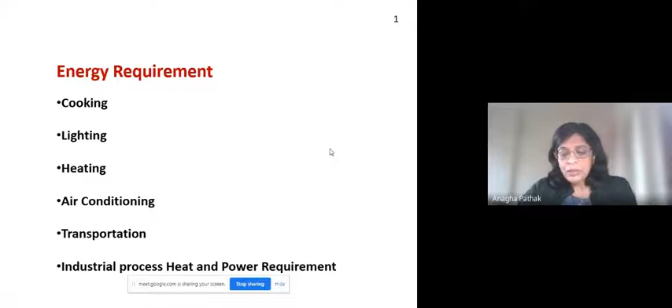So we need energy in our day-to-day life for various activities. Right from when we get up in the morning, we start our energy usage for various purposes. For cooking, lighting, heating applications, air conditioning, transportation, and for industrial process heat and power requirements, we need energy. So basically, we need energy mostly in the form of heating and electricity. The use of energy has become an integral part of our lives, so its supply should be secure and sustainable.

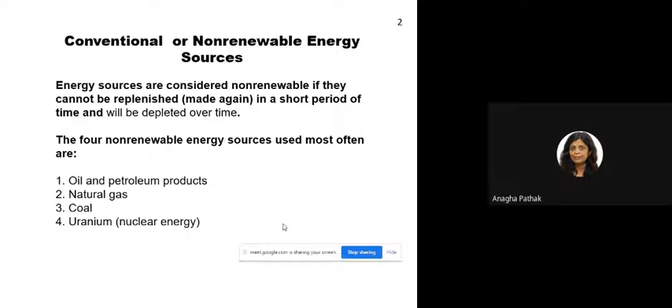So excessive dependence on oil imports, unstable energy prices, poor air quality, high levels of financial risk and uncertainty are other factors deterring the use of conventional energy sources. So now the time has come, and already the government's focus is on new and renewable energy sources. So what are renewable energy sources? It is a natural source of energy which has unlimited supply and can be replenished naturally. Renewable energy can be used again and again, and it never runs out, unlike non-renewable energy sources.

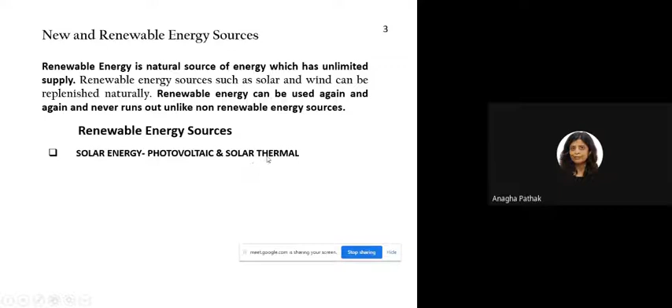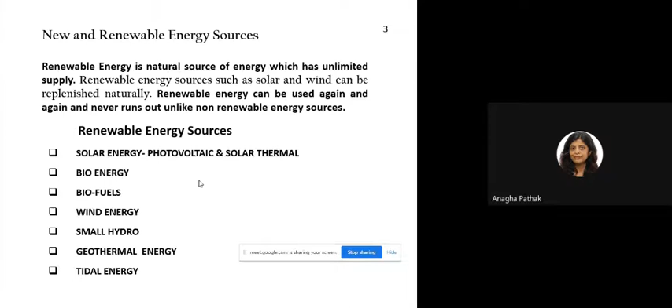So what are the various renewable energy sources? Most of us know solar and wind energy. Solar energy is in two forms: photovoltaic and solar thermal. Then bioenergy, biofuels, wind energy, hydro energy, geothermal energy, and also tidal energy. These are the various renewable energy sources. We are observing nowadays that the usage of renewable energy has increased. So what are the reasons for this?

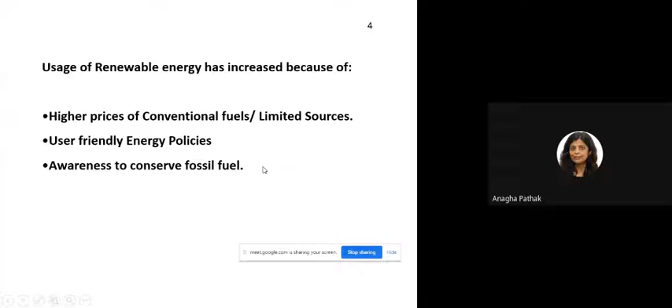The higher prices of conventional fuels and the limited sources of conventional fuels have led to the usage of renewable energy. Then there are user-friendly energy policies from our government. The government is promoting the usage of renewable energy, and user-friendly policies have been created by the government. The awareness to conserve fossil fuels has increased among people, and it also reduces the emission of greenhouse gases and helps to control global warming.

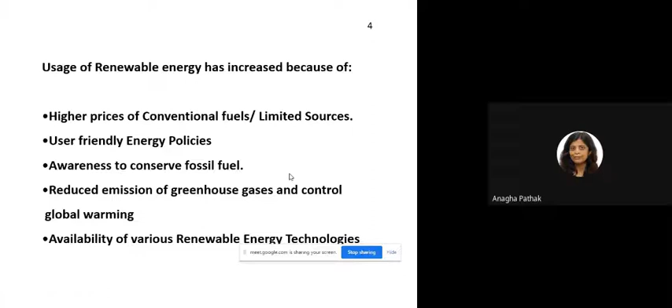Also, the availability of various renewable energy technologies. Nowadays, we have various renewable energy technologies available to us, be it solar energy or wind energy or any other form of renewable energy. Earlier, that was not the case. Very limited technologies were available. So today we will discuss the solar energy technologies available to us.

First of all, the topics of today's presentation will cover solar radiation, which is the important input for the usage of any solar thermal device or solar PV device. Then the various solar thermal technologies: low temperature solar applications, medium temperature solar applications, high temperature solar applications, and their integration. That is the most important thing, to use solar technologies in an efficient way.

So we all know that the sun is producing energy for billions of years, and solar energy is the solar radiation that reaches the earth. This energy can be converted into other forms of energy such as heat and electricity. The solar energy or the sunlight, you can say, is a very dilute source of energy, so it needs conversion in the usable form. So what are the various advantages of solar energy?

It has abundant reserve, practically unlimited, available everywhere. Then it is a high quality energy, non-polluting, and it's a natural source, and energy security is also a factor. So we can see that it is the everlasting renewable source of energy, and being the clean energy source, no potential damage to the environment. Also, it is a very large source of energy, available unlimited. Then it is free, available to all, unlike fossil fuel sources, which are concentrated at some location only. And this equitable availability plays a very important role in social development, especially in a developing country like India.

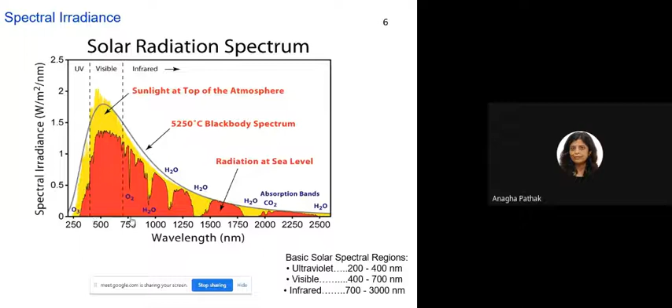So various wavelength ranges, basic solar spectral regions are, here you can see ultraviolet 200 to 400 nanometers, visible 400 to 700 nanometers, and infrared 700 to 3000 nanometers. The solar constant is measured at the surface perpendicular to the sun rays, and it is taken as the average of measurements throughout the year. So due to the variation in Earth's distance, the amount of solar radiation that is received at the Earth's surface varies, that we have seen. Then the solar constant is the average value of the extraterrestrial solar radiation over a year.

The Earth continuously receives 174 into 10 raised to power 15 watts of incoming solar radiation at the upper atmosphere. When it meets the atmosphere, it reflects back 6% of the irradiance, and 16% of the radiation is absorbed. The sun rays outside the Earth's surface travel parallel to each other. Okay, and when the solar radiation passes through the Earth's atmosphere, it undergoes several interactions like absorption or scattering interactions. And these interactions are with the gaseous molecules present in the atmosphere like carbon dioxide, ozone, or water vapors.

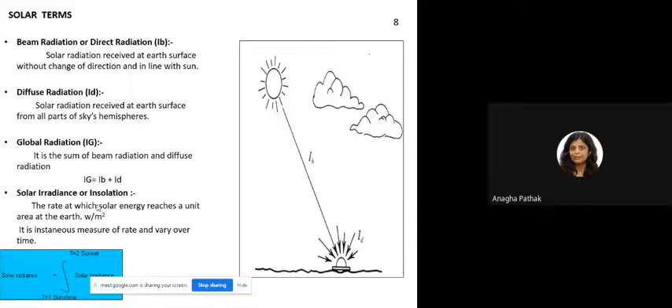So thus the total radiation reaching a given point on Earth's surface is the sum of direct radiation, diffuse radiation, and albedo radiation. The percentage of albedo radiation is very low. That's why many times we ignore it. These terms are very important. Like I explained earlier, beam radiation or direct radiation is the solar radiation received at Earth's surface without change of direction and in line with the sun. Diffuse radiation is the solar radiation received at Earth's surface from all parts of the sky's hemisphere, and global radiation is the sum of beam radiation and diffuse radiation. So for you to understand this much is enough. There are certain other terms also, so we will not go in details.

Then there are various solar radiation measuring instruments. In order to measure the global and diffuse radiation, an instrument called a pyranometer is used. Here it is shown in this figure, pyranometer. The direct solar radiation is measured with the help of a pyrheliometer, and the global solar radiation is measured with the help of a pyranometer. Normally, temperature sensors are used in these instruments. The response of the temperature sensor is proportional to the light intensity falling on the sensor, and the signals from the sensors are then converted into solar radiation intensity equivalent readings, that is millivolt.

And then a thermopile is used as a light sensor. Here there is a black plate, black absorber plate. One end of the thermopile is attached beneath this black plate, which gets heated when light falls on it, and the other end of the thermopile is kept in such a way that it does not receive any solar radiation.

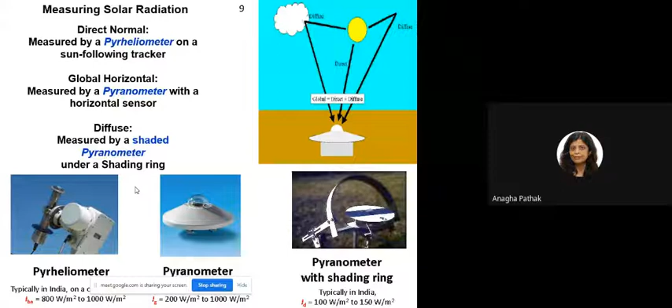So due to this, the tube should be accurately directed towards the sun. For this purpose, the tube is mounted on a 2-axis tracking device, so that at all times it should receive the direct solar radiation. So these are the solar radiation measuring devices.

Here, just a minute.

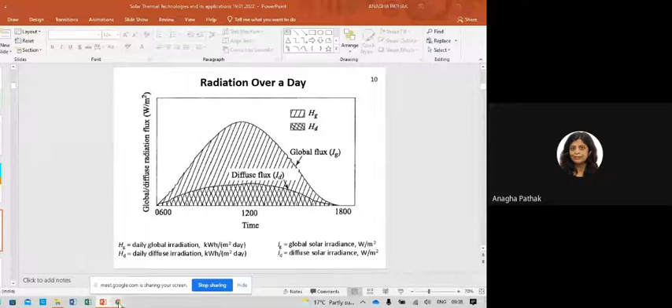Okay, so here in this figure, you can see the intensity of solar radiation is low. We can feel it and observe it also, that during the morning hours, the intensity of solar radiation is less. As the day goes on, the solar radiation goes on increasing with time. It reaches its peak at noon, and then again it starts decreasing, and at the end of the day, again the intensity is very low, and during night hours there is no solar radiation. So this is a typical curve of solar radiation over a day.

So now let us talk about the solar energy. It is available to us in two forms. The one form is solar thermal energy. When it is converted to thermal or heat energy, solar energy can be used to heat water, for use in homes or buildings or swimming pools. Also, it can be used for heating spaces like inside homes, greenhouses, other buildings.

It is used for heating fluids for various industrial process heat applications. In our industries, most of the process heat requirement is in the range of 250 degrees centigrade, which can be easily fulfilled by using this solar thermal energy. And other applications can be cooling and cooking applications.

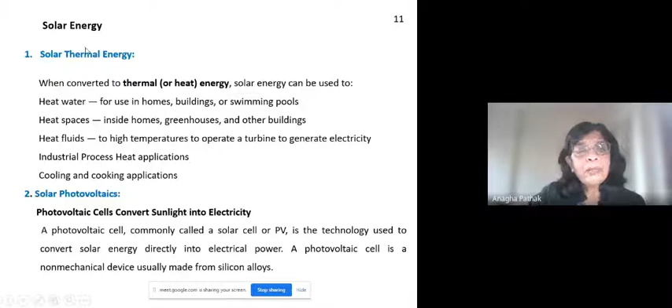So we will be talking about this solar thermal energy part mostly today. So let us see how to use this solar thermal energy. Now you understand what this solar radiation is. It is measured in watts per meter square. When this solar radiation falls on the solar collector, there is a working fluid flowing through it. It gets heated because of this solar radiation and it is converted into solar thermal energy, which we can use for various applications.

So this figure will make it more clear. This is the sun. The solar radiation coming from the sun falls on this solar collector. The solar collector is mostly painted in black color. As we all know, black color absorbs more heat. So once the solar radiation falls, because of this black color and the absorber plate, the collector gets heated, and the water or the working fluid which is flowing through this collector also gets heated.

And when the water gets heated, its density becomes less and it goes upward. This heated water always goes upwards, and then we can take it out and use it in the form of thermal energy. So this concept is common for all the solar thermal energy devices. This is the working principle of any solar thermal device, you can say.

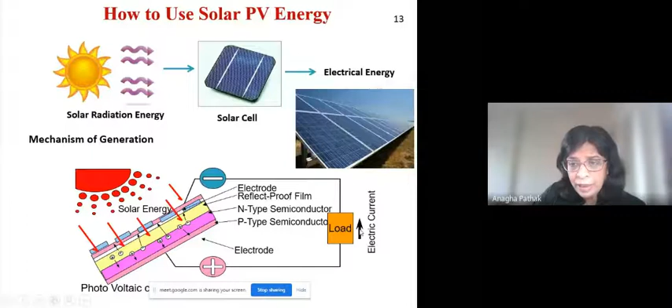But when the solar radiation is incident on these solar cells, the positive holes are collected near this p-type semiconductor and negative electrons are collected near the n-type semiconductors. When the load is connected to it, the electric current flows through it.

Under these stationary collectors, there are flat plate collectors or evacuated tube collector systems. These are basically low temperature range because no concentration is done there. Under evacuated tube collector systems, there are again various subcategories depending on the type of glass or the arrangement used, that I will explain in details in the upcoming slides.

Another category is concentrating collectors. In our childhood, all of you must have used a lens to burn a piece of paper. There we concentrate the sun's energy on a single point and increase the intensity of solar radiation, by concentrating the solar radiation on a smaller area, which can burn the piece of paper, as almost we have tried in our childhood days.

The same concept is used in solar concentrators. Solar concentrators are tracked as per the movement of the sun. The tracking can be in the east-west direction or in the north-south direction also. Depending on the tracking mechanism, if it is tracked only in the east-west direction as per the sun's movement in a day, it is called single axis tracking. And if it is tracked depending on the position of the sun in the sky, in the north-south direction also, then it is called a dual axis tracking system.

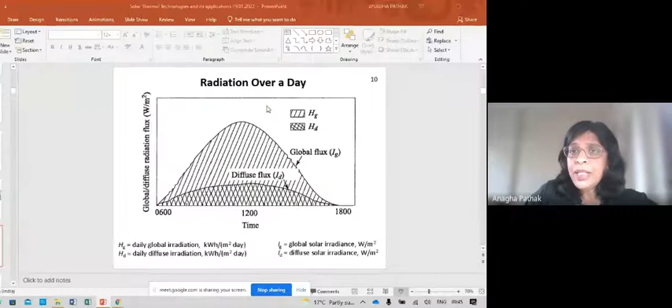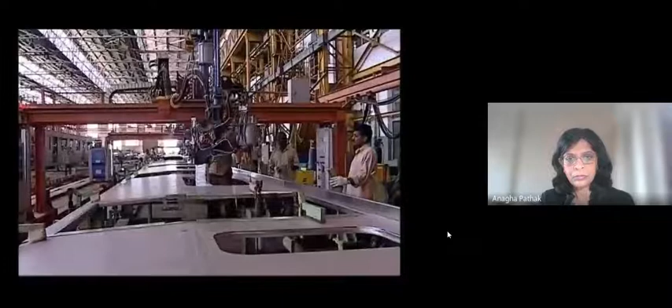Availability of energy sources is the cornerstone of development for any country. In India, the ever-increasing demands exerted by the multiplying population, rapid urbanization, and progressing economy has led to serious shortages of energy. Dependency on fossil fuels is not only adding to harmful greenhouse emissions in the environment, but their continuous depletion has led to a consistent rise in fuel prices. Currently, industries in India are relying too much on conventional sources of energy, which is proving detrimental both for the economy and the environment. We are on the verge of a serious energy crisis. But the answer to this energy crisis lies with the environment itself.

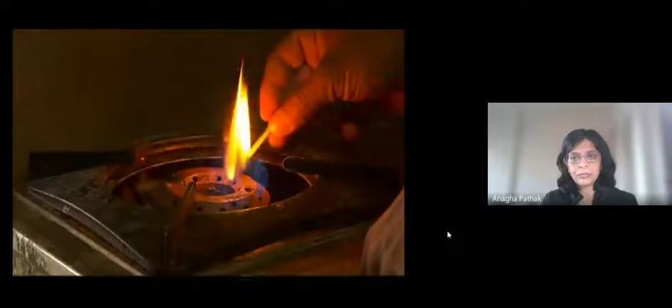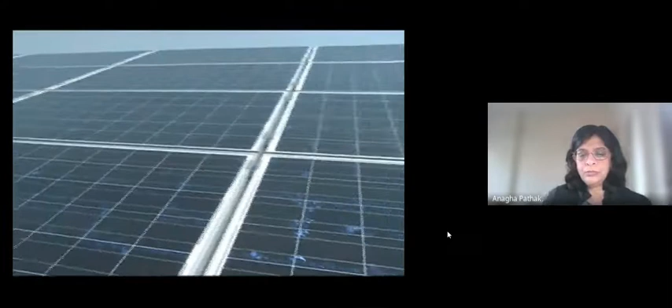Renewable energy has proved its viability amidst the energy impasse. Renewable energy sources like wind, tidal, biomass, and solar are easily available, and technologies have been developed and proven to harness energy from these naturally occurring sources for various uses. Sun is the primary source of all forms of energy on Earth, and today, with the development of different technologies, it is possible to harness energy from sun. The solar photovoltaic technology, which converts energy from sunlight into electricity, is quite a popular technology to harness sun's light energy.

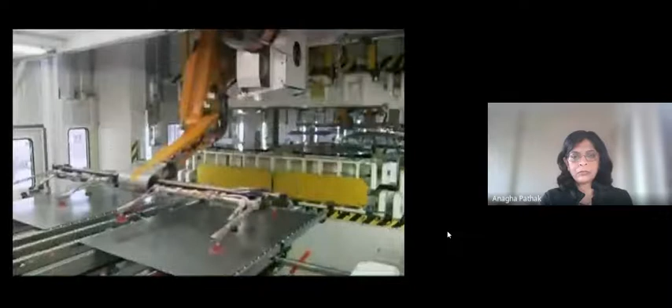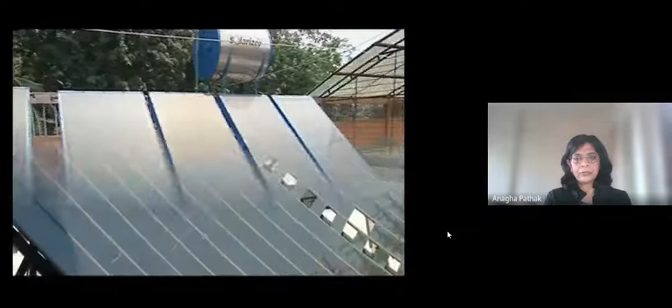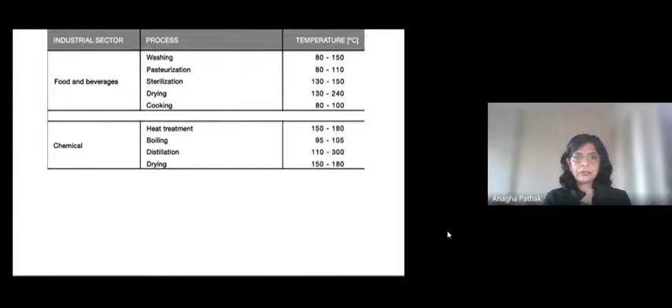In contrast, solar thermal technologies, which harness the thermal energy from the sun, are finding their prevalence in industrial sectors for thermal energy requirements in various processes. Solar thermal technology involves two types: non-concentrating technology and concentrating technology. Non-concentrating technologies include water heaters, which are a common feature these days. Concentrating technologies have the capacity to generate high temperatures, required in industrial sectors like food processing, chemicals and fertilizers, pulp and paper, textiles and tobacco, etc., among other industrial and commercial establishments which use thermal energy for process applications. These technologies can also be deployed for cooling needs in cold storages, dairies, where large-scale refrigeration is required.

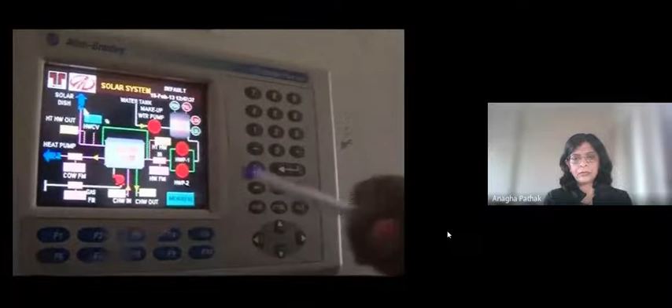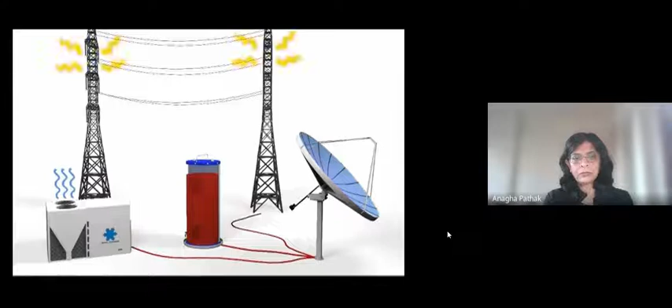So how do concentrating technologies generate such high temperatures? In solar concentrating technologies, the incoming radiation is tracked by a reflective surface which concentrates the energy at a focal point, where the heat absorbers are placed. The absorber transfers the thermal energy to the working medium. These technologies are also capable of automatically tracking the sun's radiation, synonymous to a sunflower, which tracks the movement of the sun and always faces in its direction.

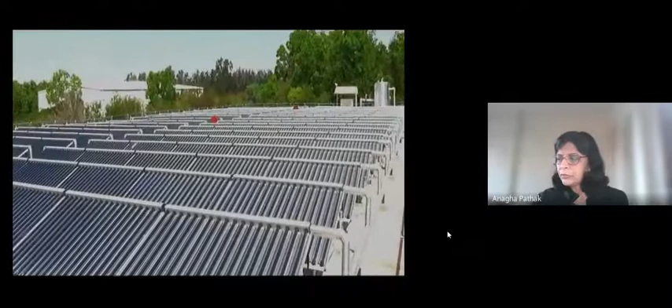The solar concentrating technologies can be divided into three categories: non-tracking concentrators, single-axis concentrators, and double-axis concentrators. Non-tracking concentrators remain static in a place and do not track the movement of the sun. Non-imaging concentrators are non-tracking type concentrators.

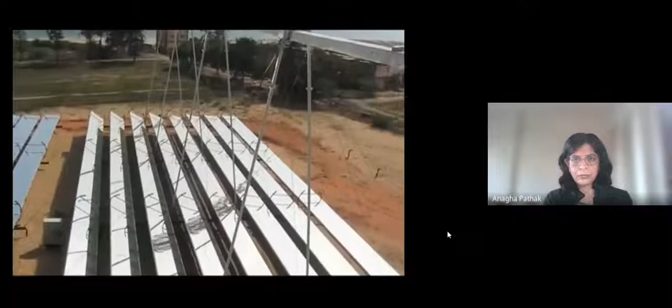Single-axis concentrators track the movement of the sun along one axis, that is from east to west. The sensors automatically direct the concentrator to stay in the direction of the sun to receive maximum radiation at all times during the day. There are three types of single-axis concentrators prevalent in India: linear Fresnel concentrator, parabolic trough, and Scheffler dish.

Double-axis concentrators track the movement of the sun along two axes, that is east to west, as well as the seasonal movement of the sun. Fresnel paraboloid dish and parabolic dish have a double-axis tracking mechanism.

So we have seen how the solar concentrators work. These are the various types of solar concentrators. I'll explain them one by one.

Why do we need these solar thermal devices? We already discussed solar water heating, solar cooking, space heating and cooling, desalination, refrigeration and air conditioning, and industrial process heat. Also, solar thermal systems can be used for power generation, but for that, high temperature solar concentrators are required.

So first we will see what the low temperature solar thermal applications are. This means the collectors or devices which can generate temperature below 100 degrees centigrade. So stationary or non-tracking, non-concentrating collectors can generate heat or temperature below 100 degrees centigrade.

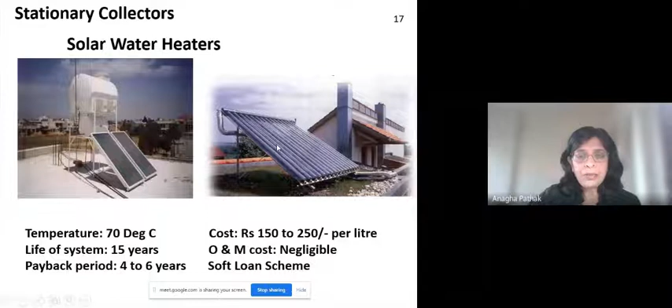What is selective coating? It means when solar radiation falls on it, it absorbs heat. The absorptivity of this coating should be more than 90%, or it should absorb more heat.

As we all know, when we make chapatis and heat that hot plate, if we keep our hand above it, we feel heat. That means the hot plate is emitting the absorbed heat. So the emittance of this absorber plate should be minimum so that maximum heat can be transferred to the fluid flowing through these riser tubes. That is the meaning of selective coating.

This means the absorptivity should be more than 90% and the emissivity should be less than 10-20%. There are various types of coatings available, like nickel, chromium, and other types, which improve the absorptance.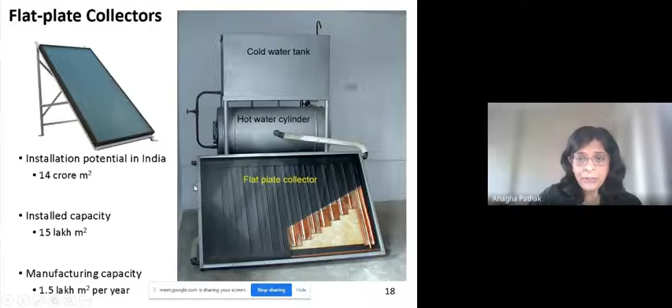Above this assembly, there is a glass. What is the purpose of this glass? Many times we may think it's to prevent dust. That is true, but the main purpose of this glass is, as we saw earlier in the solar spectrum, that we receive solar radiation in the form of electromagnetic waves.

Glass is transparent for these short wave radiations, and when transmitted through this glass, while re-radiating, it gets converted into long wave radiations. Glass is opaque for long wave radiations. So whatever heat enters inside this glass collector gets trapped there - it cannot go back. This is called the greenhouse effect. That is the purpose of this glass cover.

This is a simple construction of the flat plate collector, and how it works. There are two types of circulation: one is thermosiphon or natural convection. This is the flat plate collector, and this is the storage tank. Water enters from the inlet and gets heated through the flat plate collector. Heated water goes upward and gets stored at the upper level of the tank. This circulation continues until the required temperature is achieved in the whole tank. Suppose this flat plate collector can heat up to 70 degrees, so it keeps circulating till then.

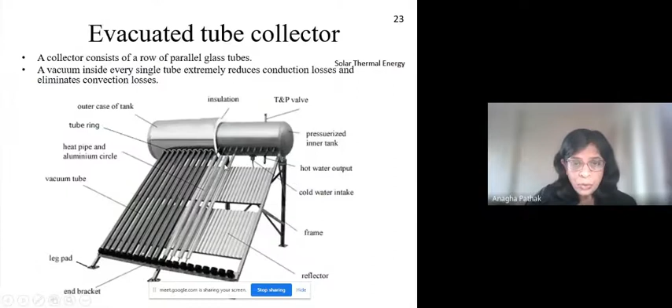The glass tubes shown here are of various types. The most popular is the all-glass tube type. There is an inner glass tube coated with a selective coating, and an outer glass tube, with vacuum between the two. The solar radiation is absorbed by the selective coating on the inner tube, and because of this vacuum, the convection and radiative losses are eliminated. That's why it performs better at higher temperatures.

And another type of evacuated tube contains this U tube, copper U tube. So actual fluid is flowing through these tubes only, and the solar radiation is absorbed and the tube is heated. That heat is transferred to the fluid which is flowing through this U tube, and then the heated water is collected in the header pipe and taken out for usage.

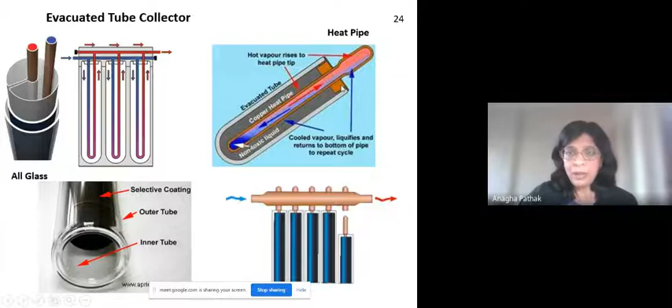Another type is heat pipe based evacuated tube. In the heat pipe there is a certain liquid which gets vaporized at lower temperature. So as it gets heated and vaporizes, it goes upward, and the heat is transferred to the fluid which is flowing through this header pipe. The water vapors get heated, go upwards, and this part gets heated, and the heat is transferred to the fluid flowing through this. Again, the cooled vapor liquefies and returns to the bottom of the pipe to repeat the cycle. This is how the heat pipe based evacuated tube collector works.

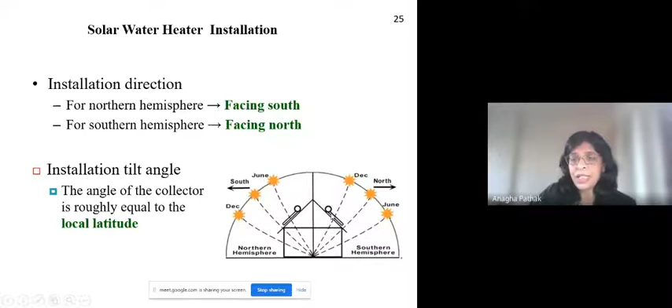So we have seen about the solar water heater installations. Usually if you stay in the northern hemisphere, the collector should be facing the south direction, and if you are staying in the southern hemisphere, then it should be facing north direction. So from this figure it is more clear that if you are in the northern hemisphere and it is south facing, then throughout the year you will get the solar radiation falling on this collector, and if you place it here you will not get the required solar radiation on the collector.

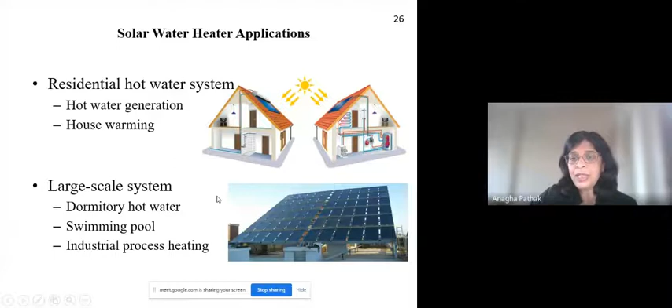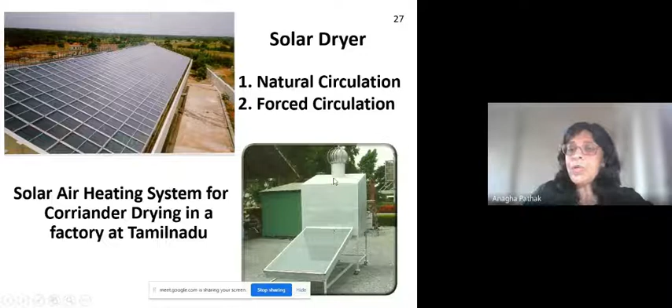So another device is solar dryer. Solar dryers are also of two types. One is natural circulation and another is forced circulation. So the working principle is same, but here, as you see, this is the collector, which is also painted black from inside, and there are small ducts or holes here, and the air enters through these holes or ducts, and because of the black color it gets heated, and the hot air, because of low density, goes upwards, and in this cabinet there are perforated trays on which the material to be dried is kept, and the hot air while moving upwards removes the moisture from the product, and this is how it works.

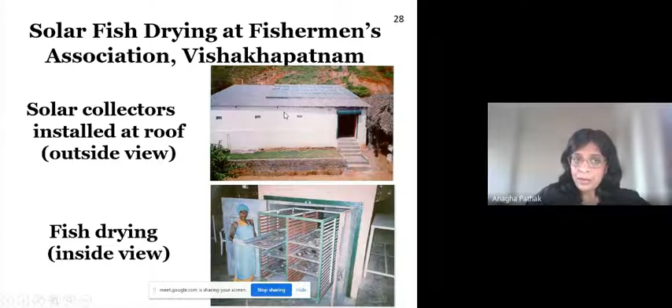So another type is forced circulation type of dryer. Here, the collectors are placed on the rooftop, and the hot air, with the help of a blower, is given to this cabinet from the bottom side. And the hot air, while going upwards, goes through these perforated trays, and it removes the moisture from the product and dries the product. So this circulation takes place. So in the forced circulation type of dryer, you can get hot air temperature up to 70 degrees centigrade. But of course, depending on the moisture content of the product, the temperature requirement changes.

So in the military areas or many remote areas where potable water scarcity is there, we can use this solar still and get distilled water or potable water. Another application of this solar still is for salt pans. In the coastal area, for salt extraction, to increase the rate of evaporation of seawater, these solar stills are used. So of course there the installations are huge. Many such solar desalination units are installed there, so that the rate of evaporation of water increases and the salt recovery is faster. So on all these products, there was a subsidy from Government of India initially, but now these products are popular, so subsidy is not required anymore.

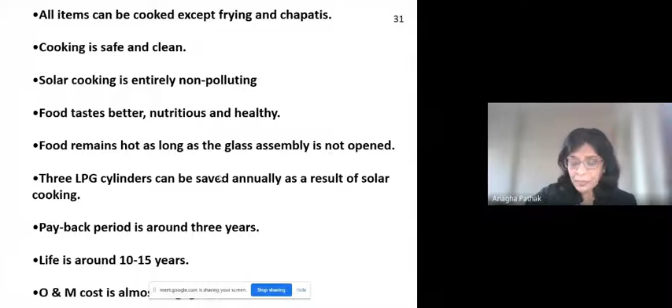Another advantage is that unless you open the lid, the food which is kept inside remains hot. Then in the box type cooker, we have seen that the frying and chapati making we could not do. So this is the dish type solar cooker, which is a parabolic cooker. Whatever solar radiation falls on this parabola, as per the property of parabola, all the radiation gets converged at the focal point. So here the heat is more at this focus point.

You can get almost 250 degrees centigrade heat. Here at the focal point, you can directly place the pressure cooker and you will get the whistles. If on your regular gas burner you are getting the first whistle after 15 minutes, here you will get it after 18 or 20 minutes. That is the difference. But it works very well.

We have tried it, and earlier we were testing these products in Center for Energy Studies. We have a test center where we test various solar thermal products for the manufacturers to get themselves registered with Ministry of New and Renewable Energy. So while testing, we have also tried preparing various products in this cooker, and it works very well.

The small size cooker can cook for a family of 6 members, and the cost is 10,000. Also, the bigger size cookers are available, which can cook for community purpose for 40 to 50 people. And if you cook one batch, then you have sufficient time. If you get the rice cooked in 20-25 minutes, then you can take 3 or 4 more batches till the solar radiation is available to you.

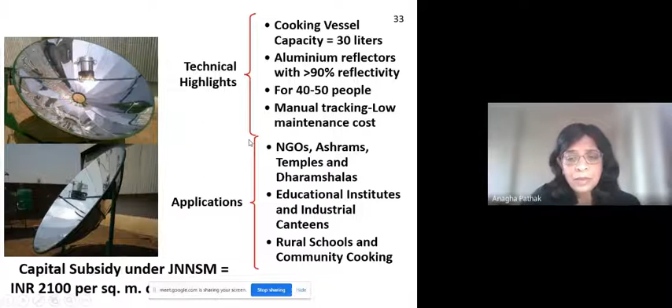And it is very ideal for NGOs, ashram schools, dharmashalas, and in many villages or rural communities, 3-4 families can use this cooker in 3-4 batches like this. So these are the various types of solar cookers which are available and popular. Some are aesthetically also very good. Some rice cookers are so aesthetically good that you can place it directly on your dining table. So this was all about low temperature solar applications.

Now the medium temperature solar thermal application. So for medium temperature, we consider 100 to 250 degrees centigrade as medium temperature application. For that, concentrating collectors are required. Flat plate collectors will not be able to produce this much temperature. So for medium temperature solar thermal applications, various types of solar concentrators are used.

So what is a concentrator? I have shown you in the video how the solar concentrator works. It works on beam normal radiation only. The diffuse radiation doesn't work for solar concentrators, because it will not be converged at the focal point, it will scatter somewhere else.

So this beam normal radiation falls on the reflector. This is the aperture area of the reflector, and from there it is focused on a smaller receiver area. So as I told you, the lens principle, like this, the solar radiations are concentrated on a smaller receiver area, considering certain thermal losses, certain optical losses. Whatever heat we get, that is known as useful heat.

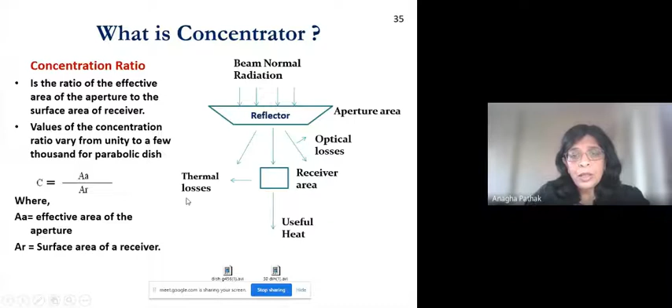So why concentration is required? To increase the efficiency, to reduce the collection area? No, it is to get the increase in temperature. So reduced absorber area, reduced thermal losses, because the lower the area, the losses will be lower. In a flat plate collector, the complete flat plate collector box and assembly, that is the absorber area. So area is more, so losses are also more. In case of concentrators, the receiver area is small, so the thermal losses are also low.

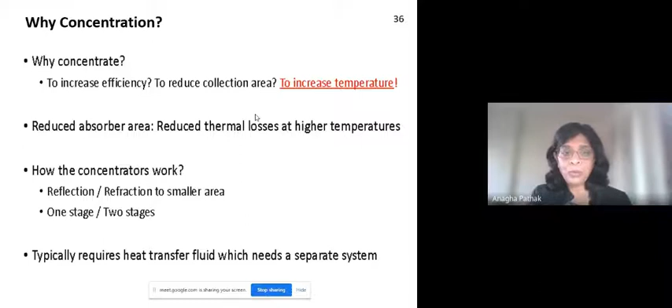Okay, so what are the components of the solar concentrator? This is one type of solar concentrator, which is dual axis tracking. So this is the reflector, which is made of some shining surface like mirror or reflecting films, and this is the receiver with smaller area. So whatever solar radiation falls on this, it is concentrated on this receiver area. Then the tracking arrangement: these concentrators need to track the position of the sun in order to get the beam radiation at all the times.

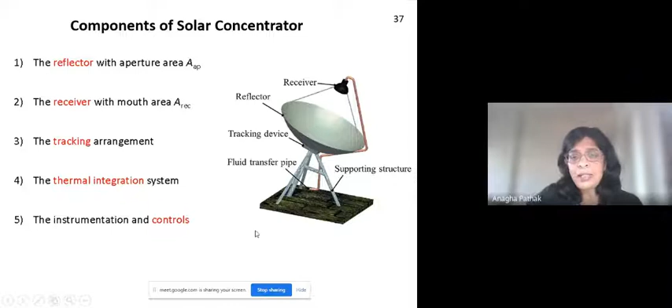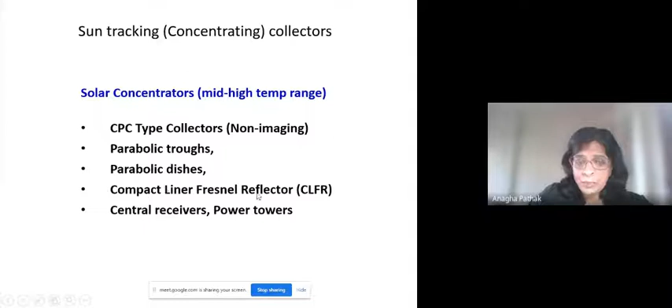Then the thermal integration system: the heat or the heated fluid which is coming out of this needs to be integrated with some industrial application or some application system. So the thermal integration system is required, and the other instrumentations and controls. So those are the components of solar concentrator. So what are the various types of solar concentrators that we will see? CPC type collectors, parabolic troughs, parabolic dishes, compact linear Fresnel reflectors, central receivers, or power towers.

So 2/3 of the industrial end energy is used for process heat application, and 1/3 of the process heat requirement is below 200 degrees centigrade. So there is a huge potential for solar energy. So 1 million tons of furnace oil worth 3,000 crores is being consumed every year for new boilers added, and total furnace oil consumed in a year is around 8.5 million tons, which is worth 25,000 crores. That was the earlier price, but now the price fluctuation is always there. So every year that price changes.

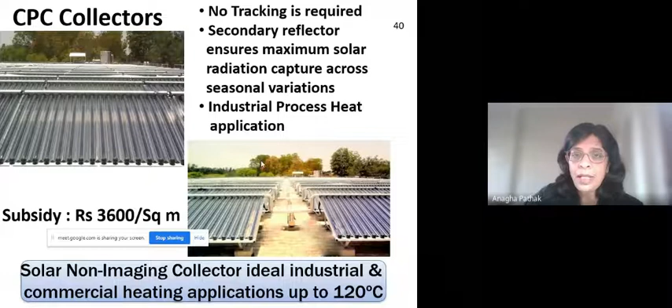So the CPC collectors, these are the only collectors which are non-tracking. These are almost like evacuated tube collectors, but the only difference is that below these tubes, there are parabolic concentrators. As the name indicates, compound parabolic concentrator, there is a compound parabola. So these tubes receive the solar radiation from all the angles, even from the bottom of the tube, which was not the case for evacuated tube collectors. So this is the most simple and most popular technology in concentrating type collectors. Because of this arrangement, it is called concentrating. Otherwise, it is also a non-moving, non-tracking collector.

Here you can achieve temperatures up to 120 degrees. So it is most popular and working very nicely in industries. I have worked in a solar company also, Thermax Limited, and we had installed almost 30 solar installations using various technologies.

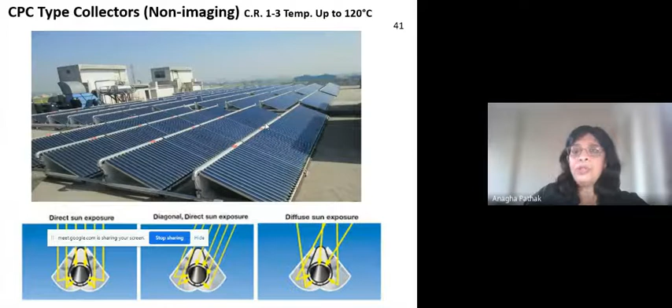We observed that this technology runs seamlessly without any problem in the industries, and it is well accepted because in other technologies, the customer or user has to take care of the tracking arrangement. He has to use manpower, and the other technologies need continuous attention. This is not the case with CPC collectors.

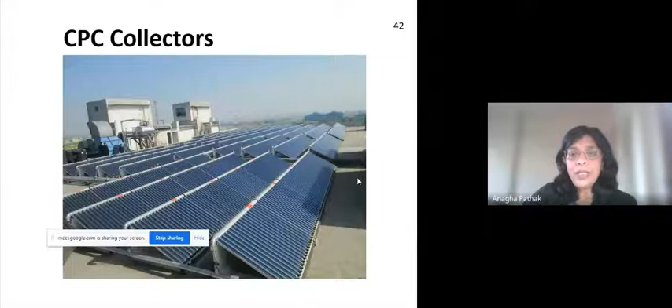Once installed, it only requires cleaning of these tubes, because if dust is accumulated, the transmittance is low, so the performance is hampered. That is the only maintenance required, mainly for these CPC type collectors.

Another type is this parabolic dish, the Scheffler dish. It is named after a scientist, Scheffler, who developed this technology. These are the mirrors. This is elliptical or parabolic, you can say.

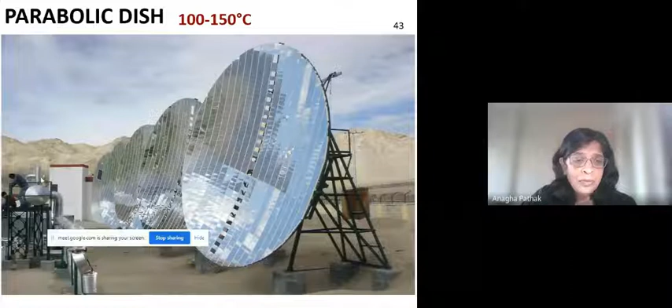Here also, in front of this dish, there is a receiver, placed here. Whatever solar radiation falls on this is focused on this receiver area, and the water or fluid flowing through this receiver area gets heated.

So I want to show you the installation, how it looks. Just let me try. Is it visible? Yes, ma'am, it is visible.

Okay. So this is the layout of Scheffler dishes used in an industry in Pune, Mahindra and Mahindra. Around 70 Scheffler dishes are installed, and the application is process cooling. The hot water required in the vapor absorption machine was heated using these solar dishes, and this was the layout.

And one more thing. This is the way the tracking is done. Of course, the movement shown here is fast, but it is a very slow movement. The tracking is done east-west, and now it is showing north-south tracking also, depending on the seasonal variation in the sun's position. The radiation falling here is focused on this receiver, and the fluid flowing through it gets heated. This is how it works.

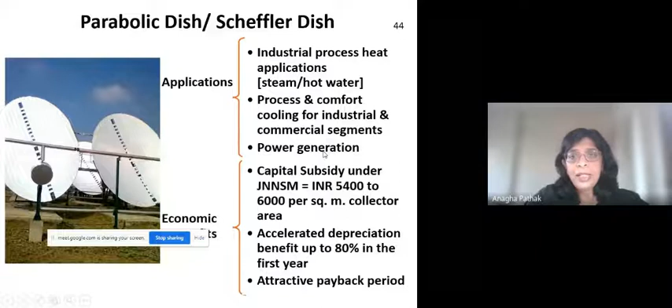This is the application mapping of the solar parabolic dish. It can be used in many industries like automobile, food, cement, chemicals, power generation, though for power generation Scheffler is not that feasible, textiles, hotels and commercial complexes, pharma industries and all. For processes where the temperature requirement is 100 to 150 degrees centigrade, these dishes are ideal. This is also a photograph of the Mahindra and Mahindra installation.

Now this is showing the parabolic trough installation. Parabolic troughs are single axis tracking devices. The trough moves from east to west depending on the movement of the sun throughout the day. The parabolic trough can generate up to 200 degrees centigrade. There are many installations by various companies for applications which demand temperatures up to 200 degrees centigrade.

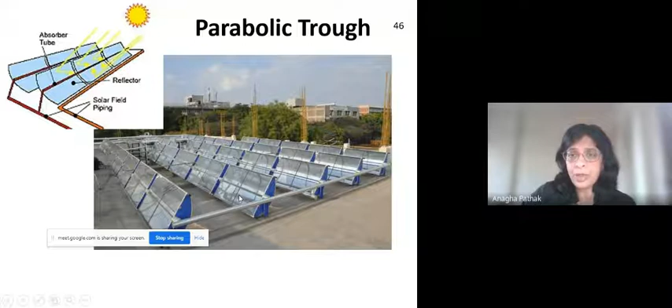Near Pune, there is a village, Shive village, where these parabolic troughs have been used for solar thermal power generation. This is a hybrid solar thermal plus biomass plant generating 250 kilowatts. When solar is not there, it shifts to biomass, and when solar is available, it runs on these parabolic troughs. It is a huge area; around 657 parabolic troughs of 6 meters area are used in this installation.

The parabolic dish concentrates the sun rays at a focal point propped above the center of the dish, and the entire apparatus tracks the sun with the dish and receiver moving in tandem.

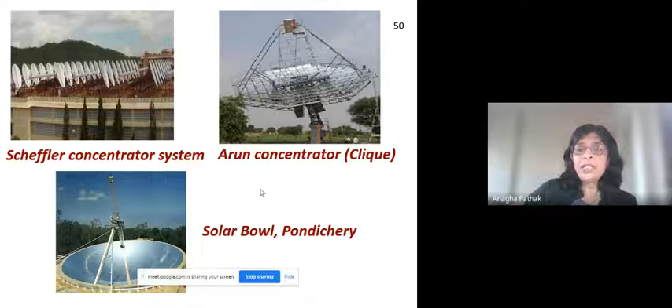In India, Asia's first largest cooking system is in Shirdi Sansthan. We were involved in installation of that system. It has been working seamlessly for more than 10 years now.

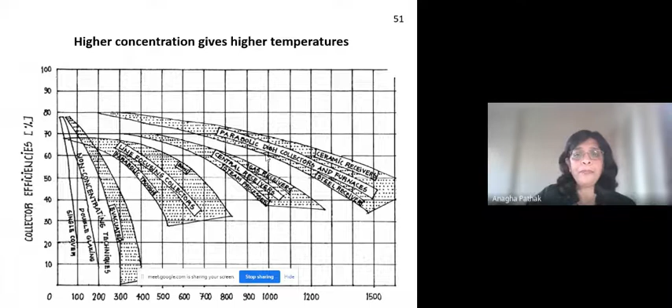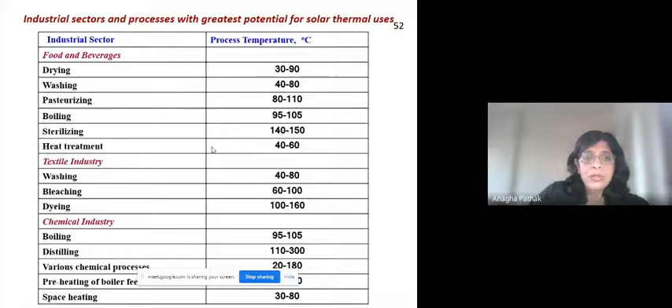So these are the various industrial sectors and processes with greatest potential for solar thermal uses. For drying application, the temperature requirement is 30 to 90. For washing, 40 to 80. For pasteurizing, 80 to 110, and so on. So you know the process heat temperature requirement, you know the technologies and the temperatures these technologies can generate. So you can decide which technology to be used for which application.

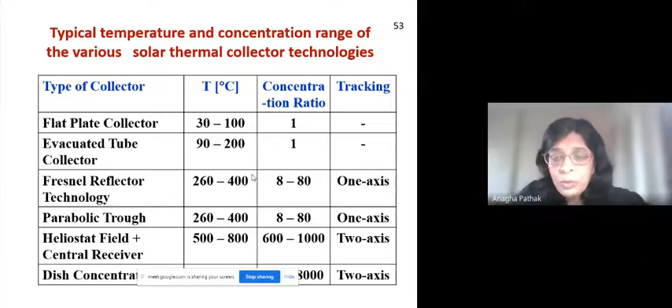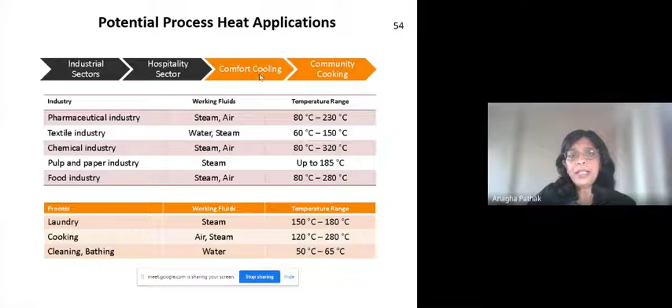It also shows the similar type, like pharmaceutical industry: the temperature requirement is 80 to 230 and the working fluid is steam or air. For laundry, what is the temperature? For cooking, what is the temperature requirement? So this potential is in industrial sectors, in hospitality sector, in comfort cooling, in community cooking.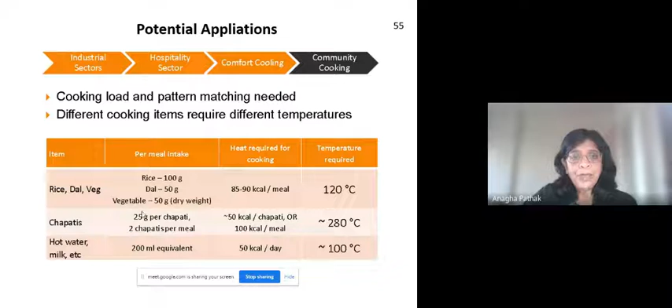And if sufficient temperature or steam is not generated, then there is a boiler which will be used as an auxiliary heating system. So in Shirdi or any other big cooking installation, such arrangements are there. In Shirdi there are 73 such Scheffler dishes, and they cook rice, boil potatoes or dal, and they cook daily for 10,000 people using the steam generated from this solar field.

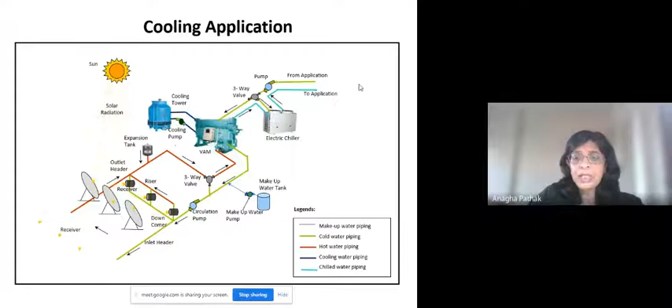Then another application is cooling. Here there is a three-way valve. The pressurized hot water coming in is given to the vapor absorption machine, and the return water again goes to the solar field. In this way the circulation goes on. So this is India's first comfort cooling at Solar Energy Centre, now named National Institute of Solar Energy.

Here they have used a triple effect vapor absorption machine for cooling application. This is an indigenous development combining a parabolic trough and vapor absorption machine. Since it was installed by Thermax Limited, who are into cooling and heating business, they used solar heating and for cooling they used the triple effect vapor absorption machine, which is also being used at the National Institute of Solar Energy.

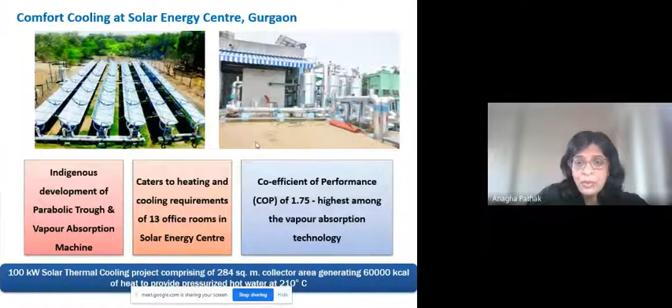So we have seen so far the various solar technologies available to us.

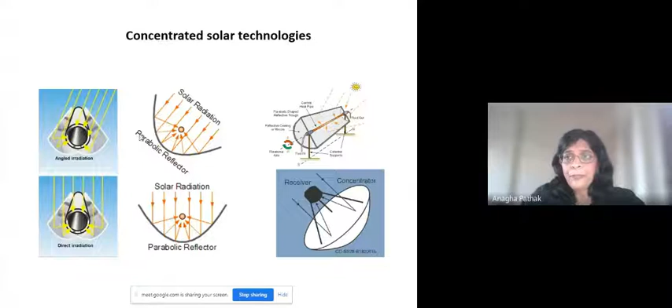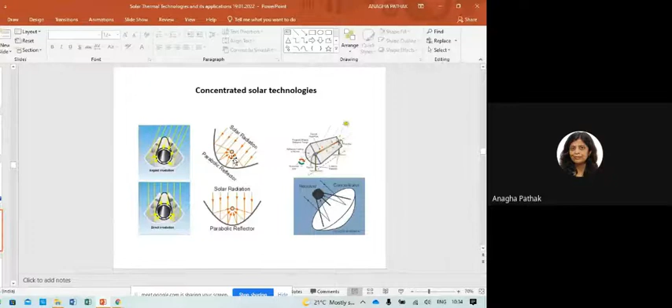Okay, the CST, concentrated solar thermal technologies, I have explained all the technologies. So how much time do I have left?

Madam, it would be better if you can wind up in 10 minutes so that a 15, 20-minute discussion can be done.

Okay, so I will skip this part, but the integration is a very important part. Now we know the technologies, we know the applications, and now we must talk about the integration technologies.

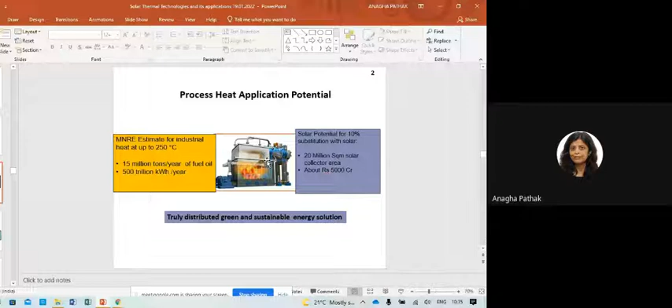So first, let us understand what is process heat. Any industry normally needs heat through boilers, oil heaters, or thermic fluid heaters. As per analysis done till now, in industries up to 250 degrees centigrade, a huge amount of fossil fuel is getting consumed, as well as a lot of heating done using electricity. Out of that, 10% can be substituted with solar, depending on area availability, which is considered a good amount. So one of the plus points of solar energy is energy security, because it will always be available to us, unlike other fossil fuels, and it is truly distributed.

So with this in mind, how do we ensure that most of the energy available from the plant gets used? So the question is, why integration? In any process plant, the boiler is the most important utility. If the boiler fails, the whole plant will be shut down, and if the plant is shut, the losses are huge.

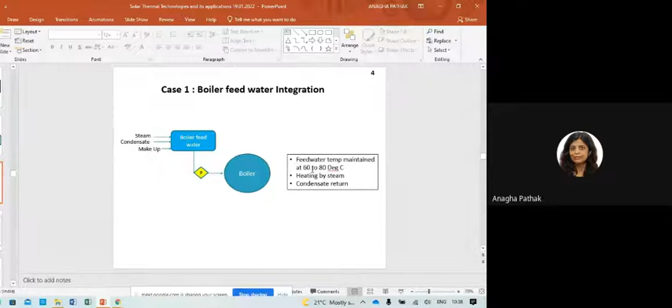So in industry, this is the boiler: the steam comes in, condensate comes in, makeup water comes in, and this is a pump. We heat this water to 60 to 80 degrees, and then with the help of the pump we give it to the boiler. So typical boiler feed water preheating is done with an isolated solar field, and when the temperature reaches 60 to 80 degrees, it is usually given to the boiler.

But instead, we should follow the practice that whatever solar heat we get, we integrate or connect it in series with the existing boiler feed water. Then it will be more viable. That way we will be able to utilize whatever solar heat comes to us, and the load on the boiler feed water through steam will be reduced.

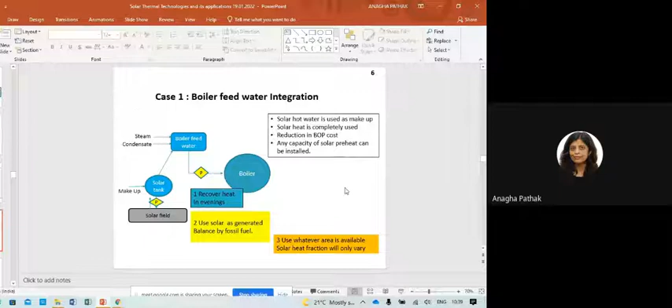If you are giving solar hot water at say 30, 40, or 50 degrees, the rest of the heat will be compensated using steam. So if you give it at 50 or 60 degrees rather than 25 degrees, the load on the boiler feed water to be heated by steam will be reduced. So use whatever area is available; only the solar heat fraction will vary.

So I will not go into the details of these case studies. One more application only I will discuss.

Solar power system. So we have seen the low temperature applications, we have seen the medium temperature applications. Now this is the high temperature application, that is for power.

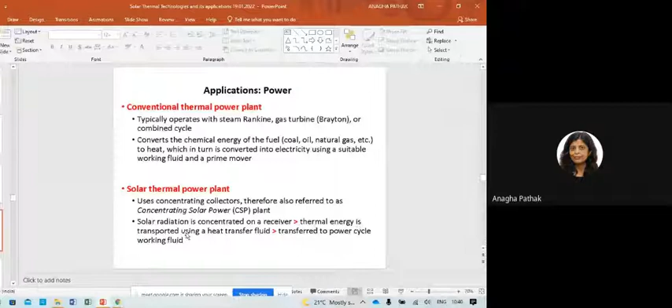The conventional thermal power plants typically operate with steam Rankine, gas turbine Brayton cycle, or combined cycle. It converts the chemical energy of the fuel, whatever it may be - coal, oil or natural gas - to heat, which in turn is converted into electricity using a suitable working fluid and a prime mover. In case of solar thermal power plant, it uses concentrating collectors, therefore also referred to as concentrating solar power, CSP plants. Solar radiation is concentrated on a receiver, then thermal energy is transported using a heat transfer fluid, and then it is transferred to the power cycle working fluid.

So basically there are three parts of this CSP plant. One thing we have to remember - it only uses beam or direct radiation. Then the solar field concentrates the incident solar radiation and transports thermal energy using heat transfer fluid. Then the thermal energy storage part, for use during no or low sunshine hours, and the power block for conversion of thermal energy into electrical power.

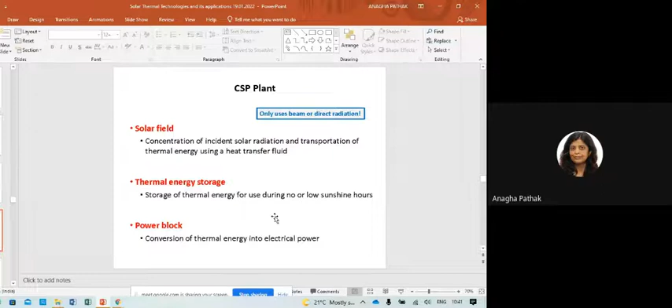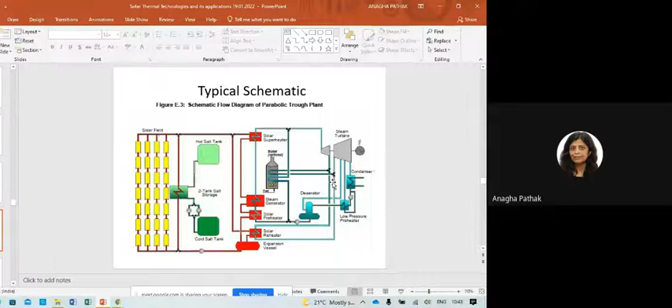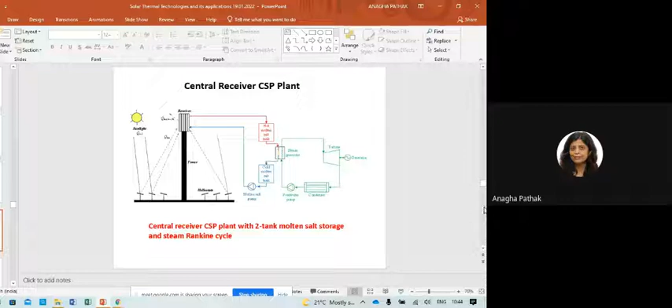Thank you. There are many other things also, but in one lecture it is very difficult to cover all these aspects. So now, if you have any questions, please feel free to ask.